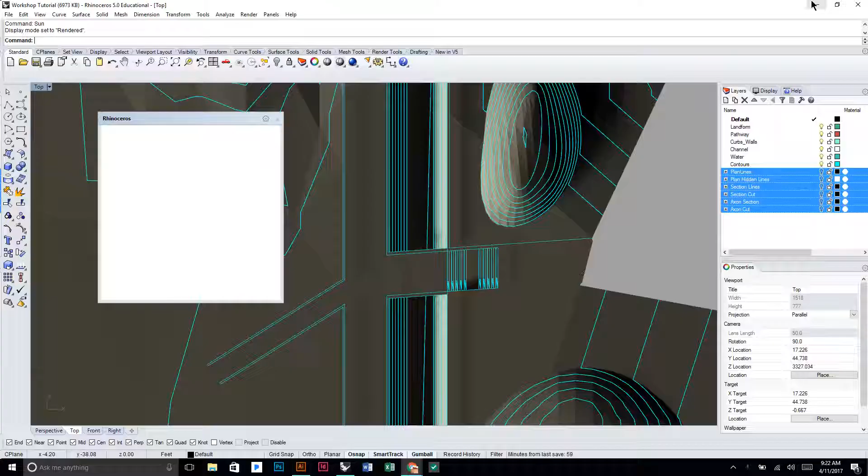If you want to do a clay model rendering, type sun into Rhino. That'll bring this up. Make sure to turn it on and change your viewport to rendered. Right now it's working in shaded, where you just have the color of the layer.

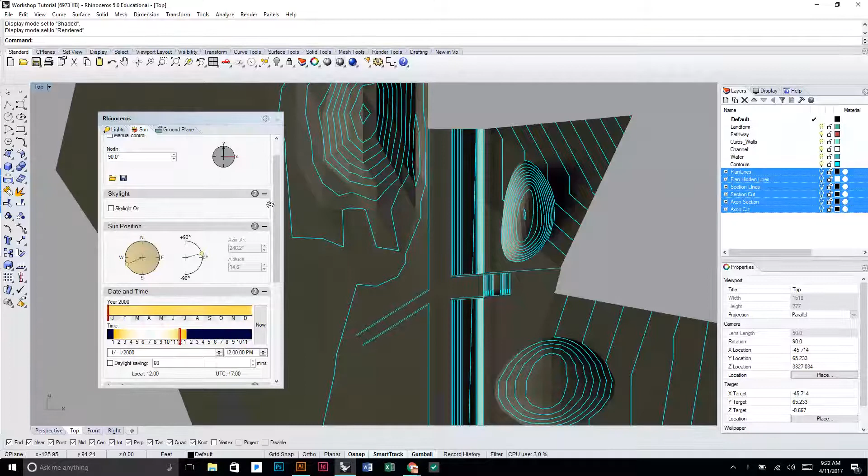I'll turn rendered on. You can see that the sun is set, looks like it's fairly late in the day. What's cool is that you can actually probably find a decent location, so I'll scroll down here and see if there's... I don't know if it's going to have Fayetteville. What would be the next closest place? Let's try it. Yeah, there we go.

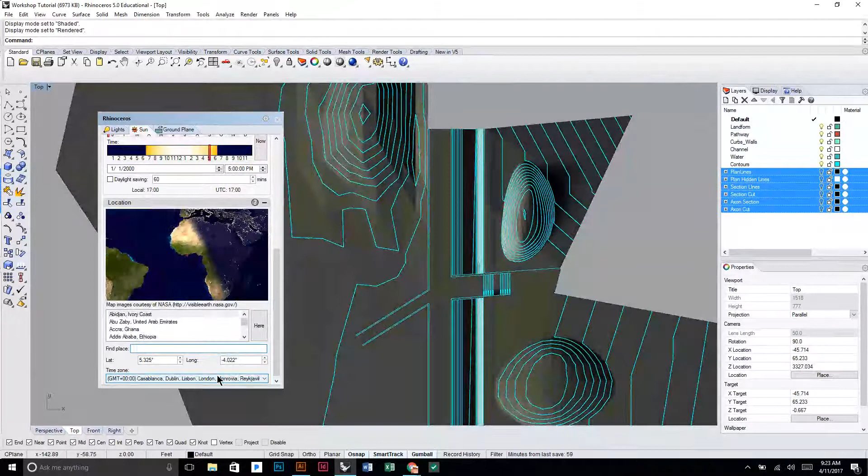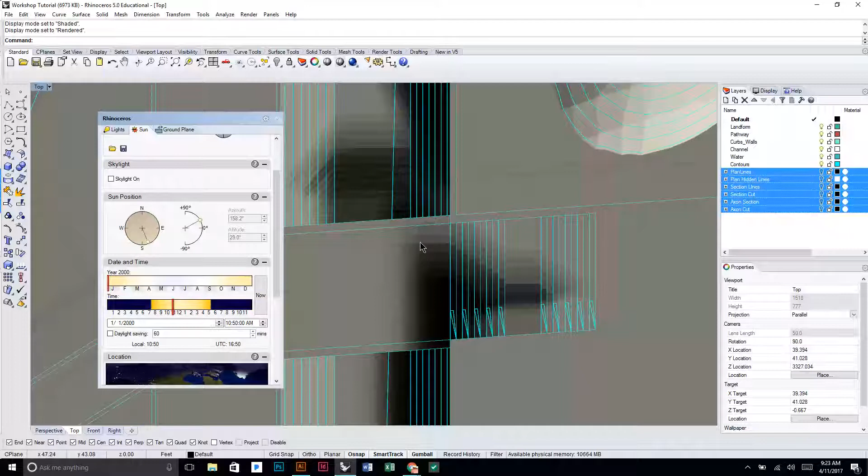So we can make that our actual setting or location. We can then change the month, the time of day, however it's going to best fit your project. It starts to give a little preview - don't worry, this isn't what the actual rendering is going to look like, it's all pixelated. But you can start to see that this shadow is showing the stairway, which is good, as well as the profile.

I'll turn that on. A good thing to do is go to properties, Rhino render settings, make sure that's high quality. This goes back to knowing how big this drawing is going to be - if it's 8.5 by 11, or 11 by 17, or 24 by 36, whatever that dimension is, multiply it by 300 and that'll give you your resolution setting. That'll make sure it's a high quality one. I'm not going to do it too high. I'll set my DPI to... maybe I'll do 200 so it doesn't take forever.

You can always change the quality too with this setting, change it to high - let's do at least normal. Hit OK, then go up to render. You can see it's still a little grungy with some of those settings. The shadows are really dark, almost covering those objects. You can change that by going to render properties.

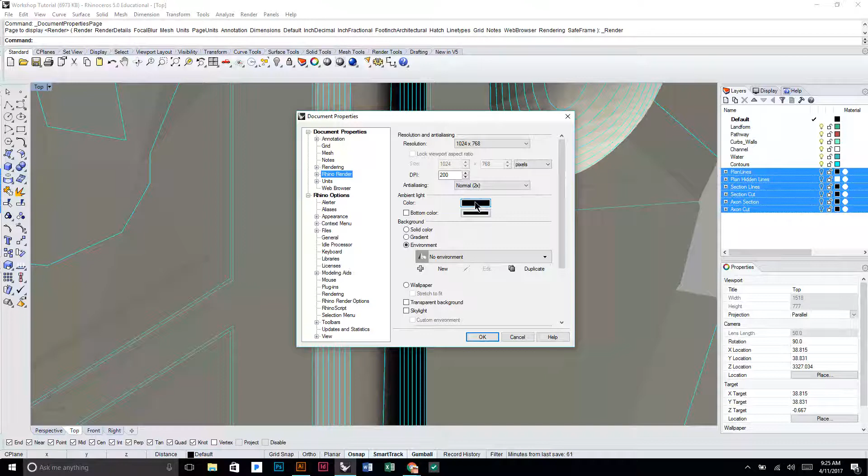You can actually add some ambient light so that the shadows aren't too dark. You don't have to do too much to reduce the harshness of those shadows. I'm still going to keep it fairly dark. Hit OK, now we'll render this out again.

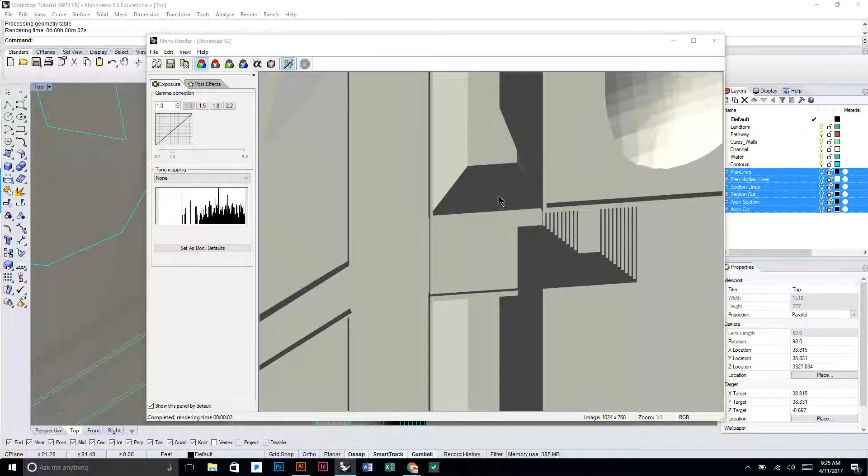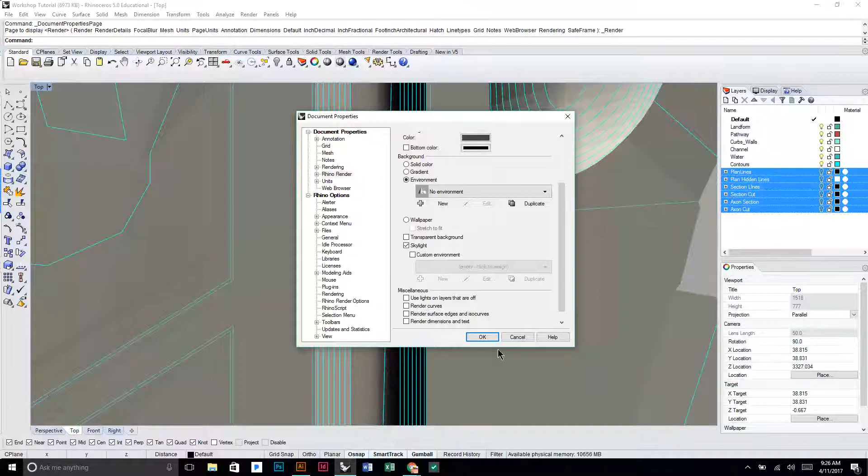Now you can see that the shadows start to get a little bit lighter. If you also wanted more of a diffuse shadow, which is good for diagrams - maybe you don't necessarily want that hard line shadow, but you want a shadow to show depth - go back to render properties and choose skylight. This is going to create a light source that diffuses those shadows. I'll hit OK. You can see it's already kind of drastically changed the quality of that.

However, I like this, even starting to merge the two shadow types - this one actually still keeps those hard lines, but you can start to see how the shadow reads pretty cool. Now you can actually see the shadow from all those steps, the hard line from the wall, without actually losing those objects underneath it.

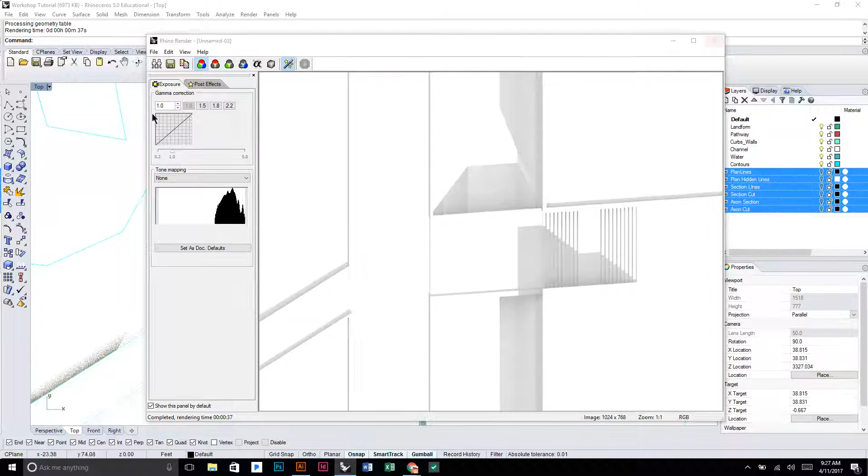Same with this profile. This can be really cool - you render out something like this of a clay model, then you save that image by going here, and then you do your Make 2D to get the line work, and then you can overlay them in Illustrator to have both the line weight and the render quality.

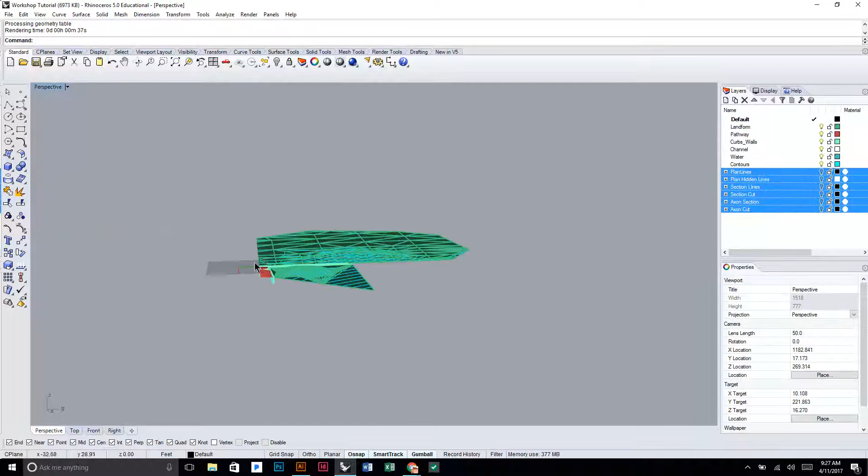So could you pan around into perspective view and show them the render again? Yeah. I think this is awesome, to be able to see how you can use this one 3D model to build your sections or perspectives, both the line work and also, like Bill was just saying, I can't stress enough how fast it is to be able to build a perspective.

Adding entourage in Photoshop - if you start from a perspective view like this, then render it out with the shadows, and then render out or export also the Make 2D version, to combine those things.

Yes, Ken? Do I have control over your own vision? Yes, you do. So that's perfect, because that segues into this.

Once you figure out your location, it's good to make sure that you're actually at the proper eye level. This helps confirm that your design works with the scale that it's intended for. If I stick within this properties panel, I'll zoom out and you'll see there's a camera position and a target position. The camera position, you want that Z location to be somewhere within that eye level, around 5.5 to 6 feet. This is already pretty close at 6 feet, so I'll just hit 6.

This also depends on whether the surface you're standing on is actually at exact zero, or if it's at a different elevation. Whatever elevation this model is designed at, you add 6 feet. So if it's at 150 feet already up in the air, you change the Z location to 156 feet - always just add that 5.5 to 6 feet Z location. You can then change where the person's looking - up, down, straight across - based off of the target, so Z target, it's looking pretty high up.

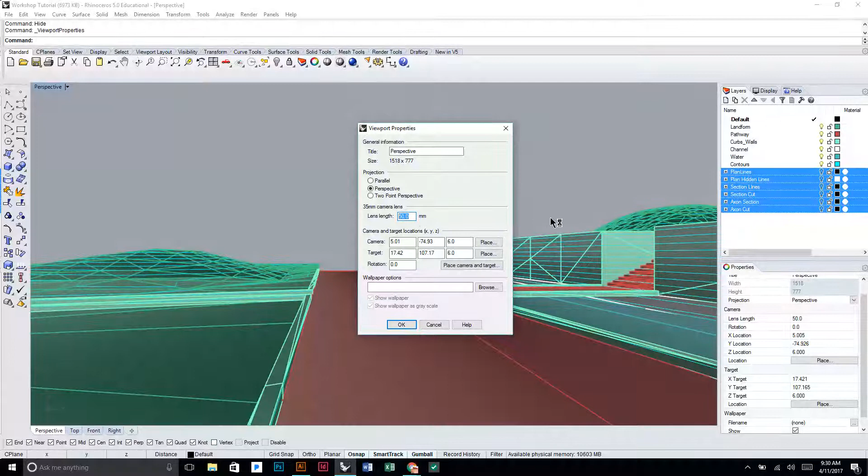The last thing is to actually change the viewport angle, or that eye line. So in perspective, right click on perspective, go to viewport properties, and you'll see your camera lens length. If you change it to 35, we start to get a wider angle. If you change it to 75, it becomes much more narrower.

Usually what's great, if you ever want to match this with a photograph, a lot of times if you look at the properties of that photograph, it'll tell you what that camera length is. So you can just input that into your settings here, and it'll match almost identical. It's pretty beautiful in that sense.

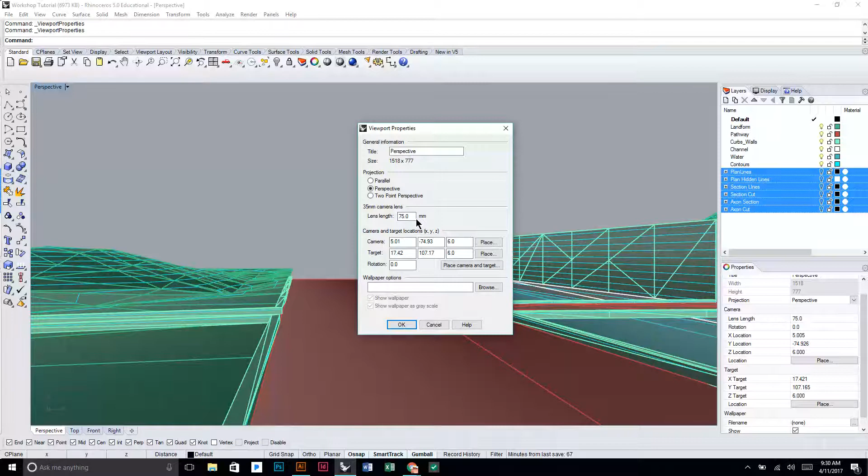So go 28, yes I know your favorite. There you go, you can see how it really kind of increases the width. Something that's cool too is you can see that it's still maintaining your Z location and your Z target.

If you want to move forward, it looks like it's somewhat on the Y-axis, so I can just choose Y location and change it to be maybe closer to 60, and start to kind of move throughout the space.

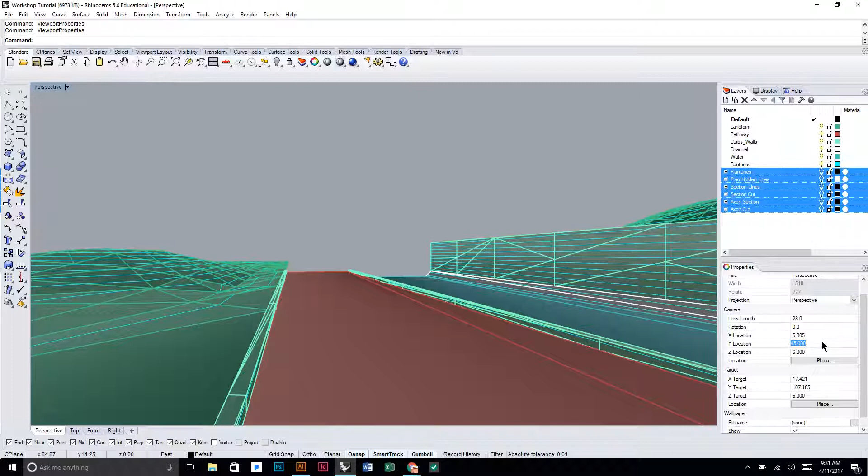You could always even just place it if you know where you want that person to stand. You can say place, and it's going to look for something to snap to. So let's go back to that real quick.

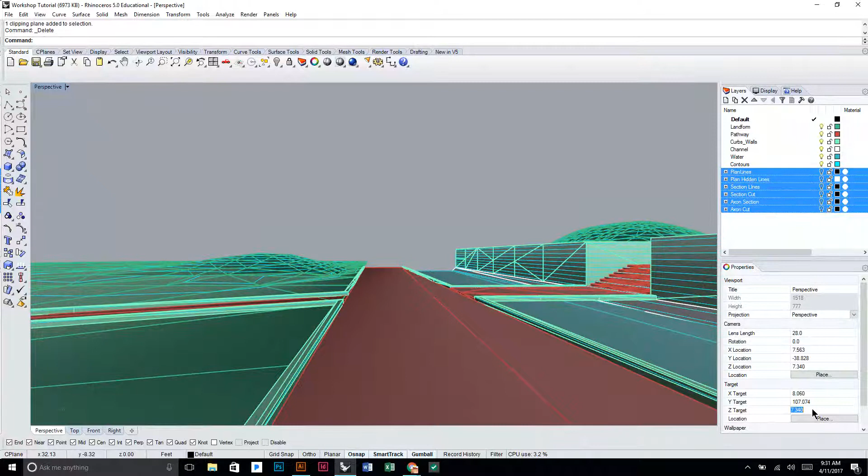I want to zoom in a little, let's get a little closer. And like we did before, we can just simply go to render and start to render out this view.

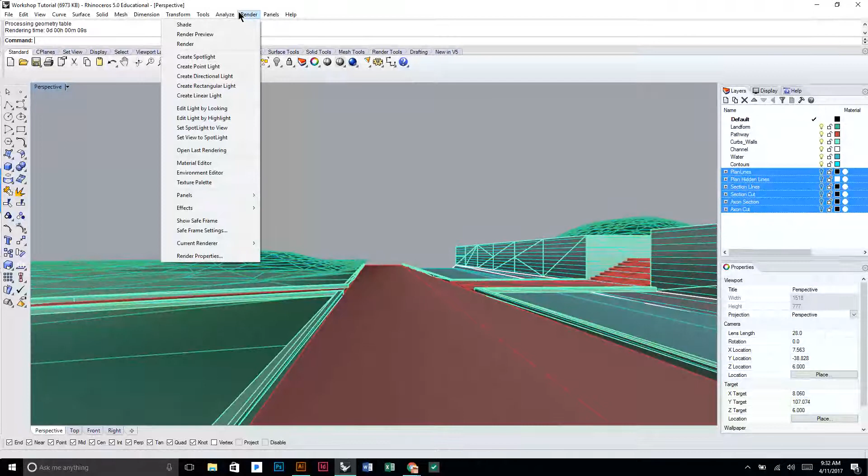Let's get a little, it should... it might have been clipping that a little. So if you go to render and choose safe frame settings, select it to be turned on. I don't know why it's not showing it. Oh, I probably have to turn on render, show safe frame.

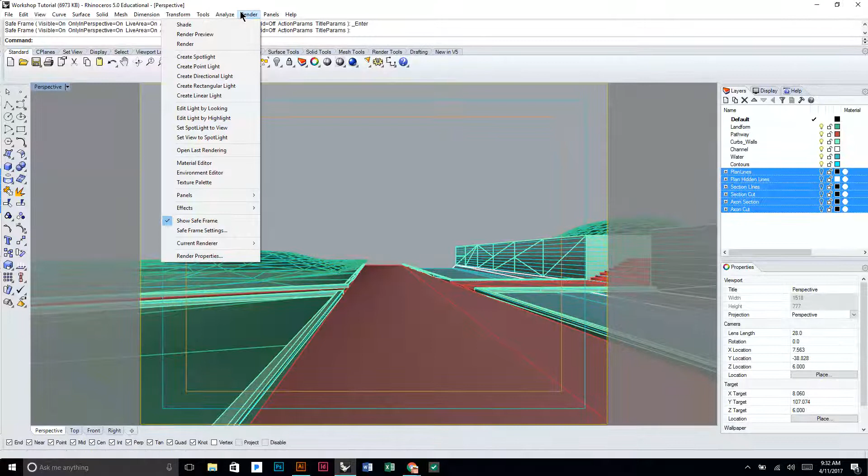This is essentially what that rendering output is going to be within. That's why those stairs were being clipped. So you should go to render, safe frame settings. And if you want the viewport of Rhino to be what the rendering output is, you have to make sure that you go up to rendering, to Rhino render, and change the resolution to be your viewport. Hit OK, and now you can see that safe frame has expanded for the entire window of your Rhino space.

Render it out. It wasn't that much larger, so it shouldn't take that long.

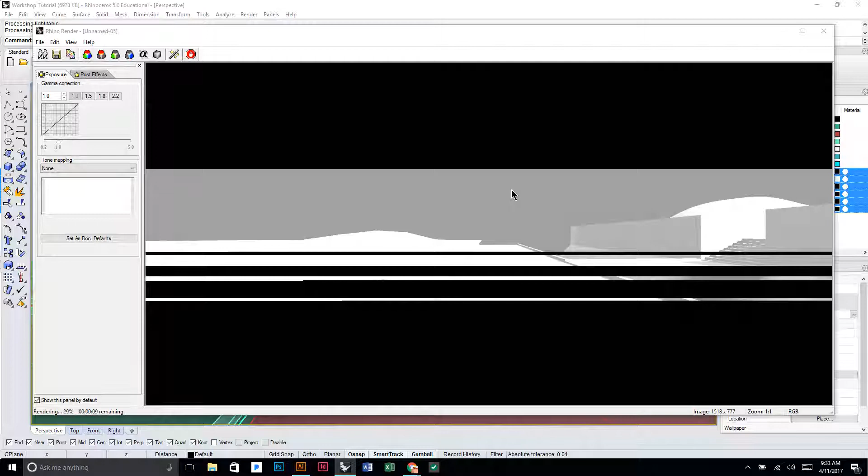Now you have a nice clay model where you can even start to see, even though this is just the default Rhino rendering, the shadow quality changes based off of the actual geometry, where you have the hard shadow along the curbs and the stairs, but then you even have this kind of more diffuse shadow where two shadowed objects are overlapping with each other. So it gives you a lot of range of depth with the shadow quality.

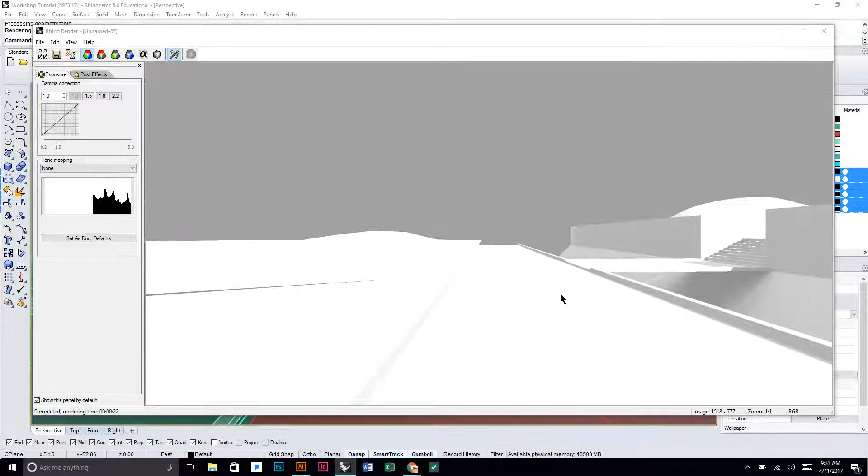So we combine that with the Make 2D lines, right? So that you have the clay model with the Make 2D lines over it. Can make a really great base for perspective. Yeah, I just ran that Make 2D command.

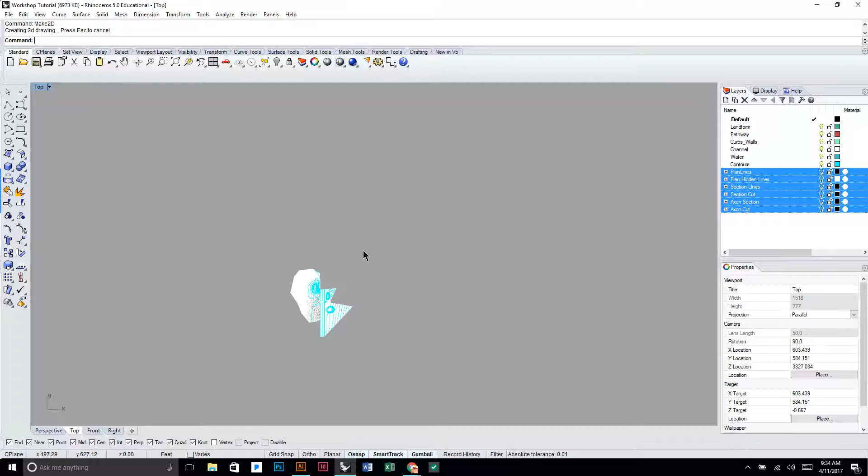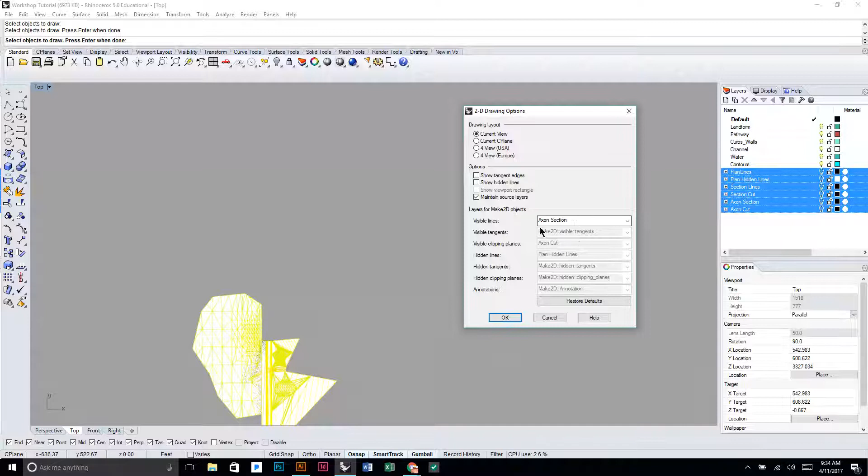We'll try and find it wherever I made it. I probably just screwed it all up, but probably didn't change the layer name. If you don't change the layer name for that Make 2D command - I kept it as axon section - if there's already objects on that axon section layer, the initial line work is going to prevent the new one from working. So always rename that.

Any other questions? Is there an easy way to kind of turn down the harshness or the brightness to get more?

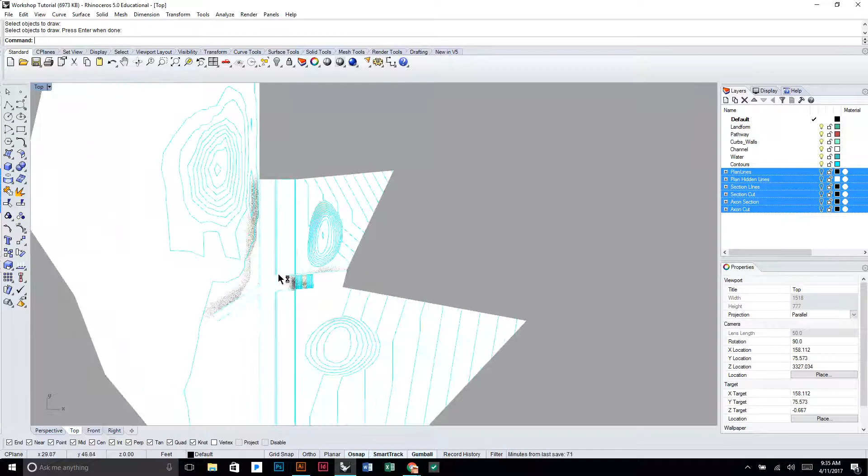Yeah, so that all goes back to those lighting settings. So render properties - I'll just bring this to be much more darker. Let's try it now, I'll just do a preview. Once you turn on the skylight, that is going to wash it out a little bit, but if you change that ambient light to be back to a darker setting, it'll make those shadows back to a more richer color.

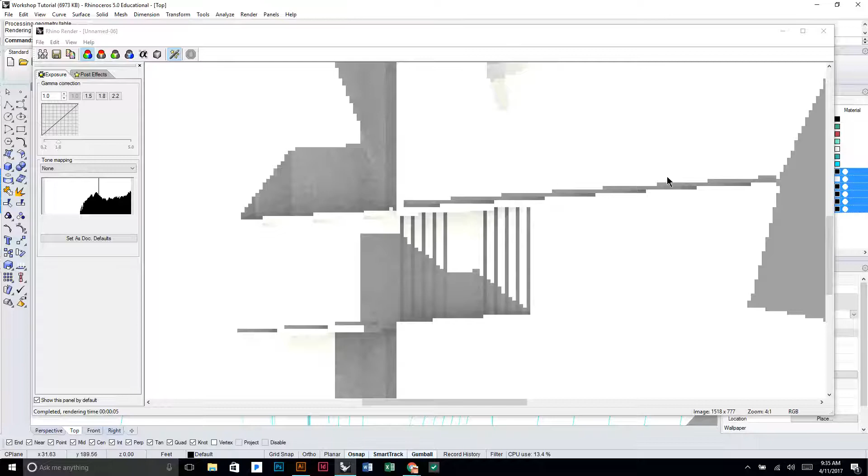Do you all have access to actual rendering software here? Is that part of your suite of software you can purchase, or is it available through the college in some way? It looks like with me on my computer, the student version - that's just that building component.

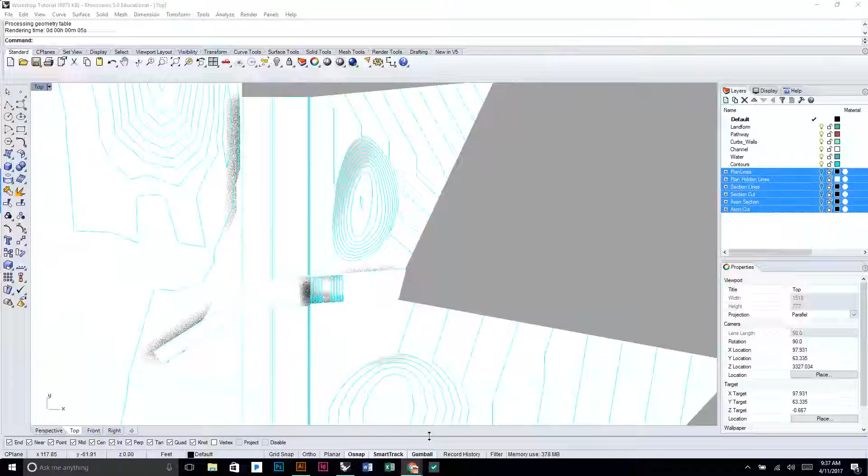Lynda is a great resource. If you just search my name on YouTube, I have a bunch of videos that are specific to some of my classes. I wouldn't say necessarily model building, but right now I'm teaching a site grading class, so if you want to know how to do cool site grading and surface manipulation using Rhino, not to toot my own horn, but that's a great resource. A lot of that uses Grasshopper too. But yeah, there's plenty of definitely good resources out there. Lynda.com, I think, is the best way to learn - just watching the first few chapters of that, and then Googling around if you have specific questions about how to do something that's more landscape architecture.